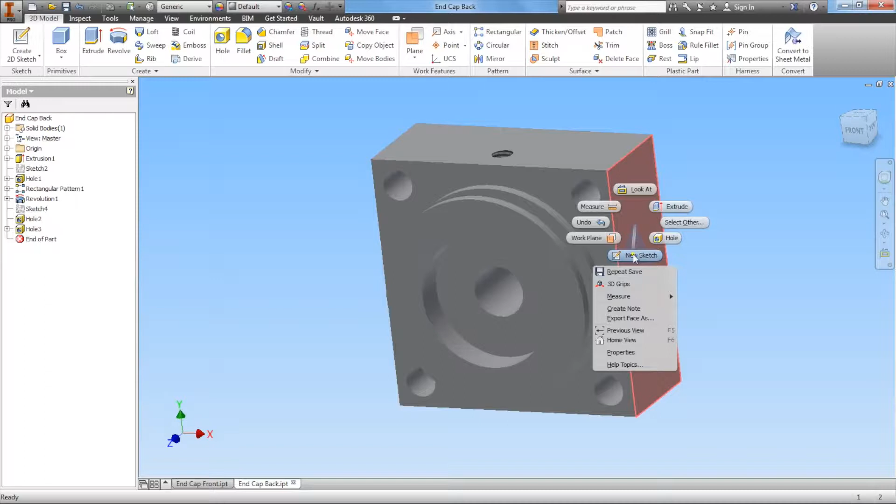Before we add our part on the right side here, we need to mark off a point that will indicate the center of where our hole is going to go. So let's go to this right side, right click, and create a new sketch. Then we're going to grab the point, the center point.

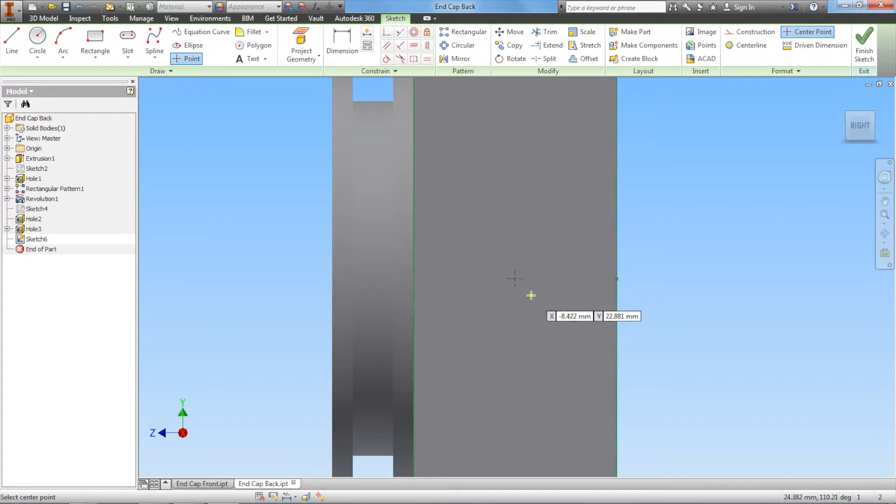I could just place this point anywhere and then use the horizontal and vertical constraint to center it, or use something a little more time efficient. As I get closer to the center here, notice these purple dotted lines - that indicates the center, both vertically and horizontally. If I move it off a little, I'm centered vertically but not horizontally. Now here, I'm centered horizontally but not vertically. But now I'm centered in both directions. So place a point there, and that is the exact center of our right side.

That's exactly where the center of our hole is going to go. So right click, OK, get out of that, finish sketch.

Now we can go and grab our hole feature, and here are the settings you're going to need: you want to do from sketch, it's got to be drilled, simple hole, angled, and your depth is going to be 10 millimeters and your diameter is 10 millimeters. Make sure your termination says distance here. Once you have all of those, go ahead and click OK on the main menu or the green check mark on the mini menu.

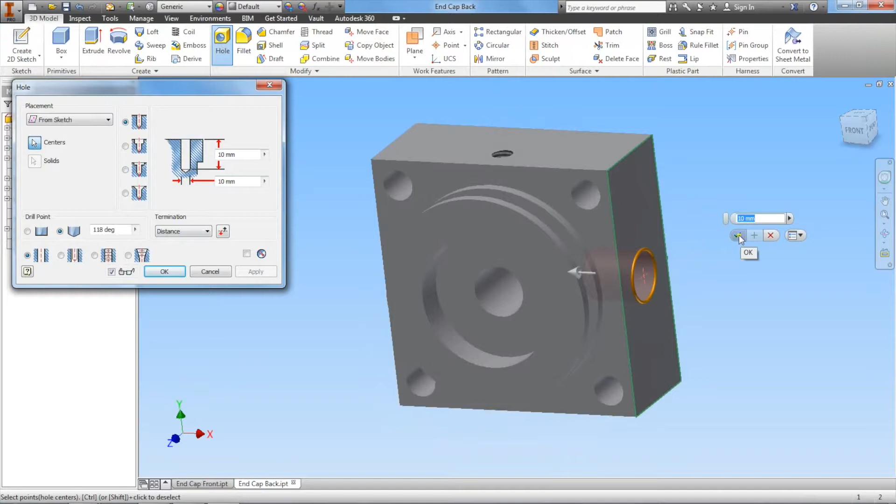Now this hole, like I said, doesn't go all the way through, and we need one identical to that on the left side also. To accomplish that, I'm going to show you a new feature, the mirror feature, and also adding a new work plane feature.

Before we get to the mirror feature, let's go up to plane and go to mid plane between two parallel planes. I'm going to create a middle plane, starting with this right side. Left click on that, then go over to this left side and left click on that - see what it did, that feature created a work plane halfway in between. These two planes are parallel, and it created a mid plane right in between them.

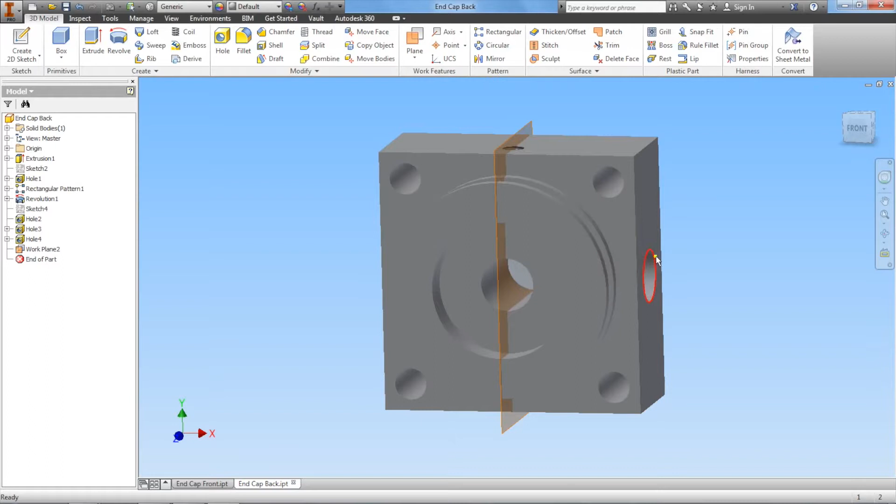Now the next thing we're going to use is the mirror feature. Notice that the mirror feature is located in this pattern section because we've already created a hole and we just want to duplicate it. That's what you do when you're using any of these pattern features. Whenever you're using anything in the pattern section, the first thing you need to select is what feature you're going to duplicate, and the feature we want to duplicate is this hole here.

Now that's highlighted, we want to go over here and select mirror plane. Which plane do we want to mirror, to use as a mirror so to speak? This is the halfway point of our part here. So if we select this plane we just created, it's going to put this hole the same distance from this plane on the opposite side. Let's go ahead and select this, and then click OK.

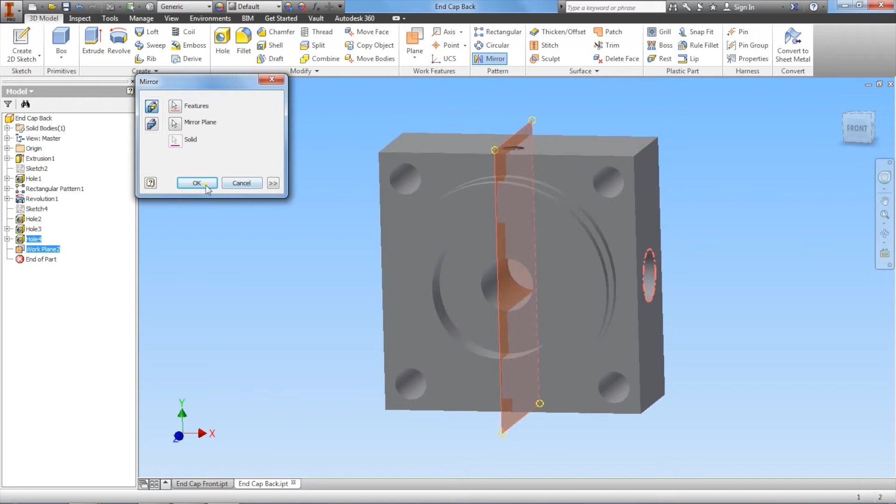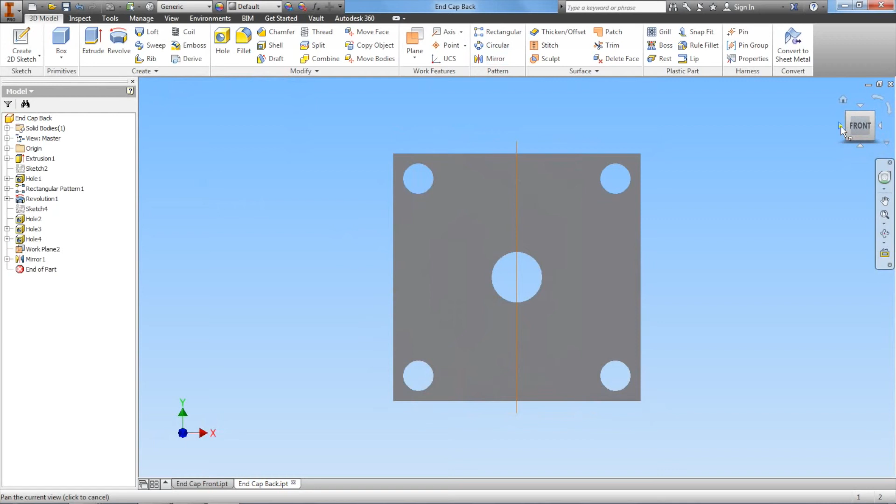Now if I go around to my left side, you can see I have another hole just like the one on the right side. Now, that technique I just used, there are different ways to achieve that same outcome - you could just go over to the left side, place the point, and choose the hole feature. You could do that also, but as you get into more complex parts, understanding and knowing all of these different features available will make working in Inventor a lot easier.

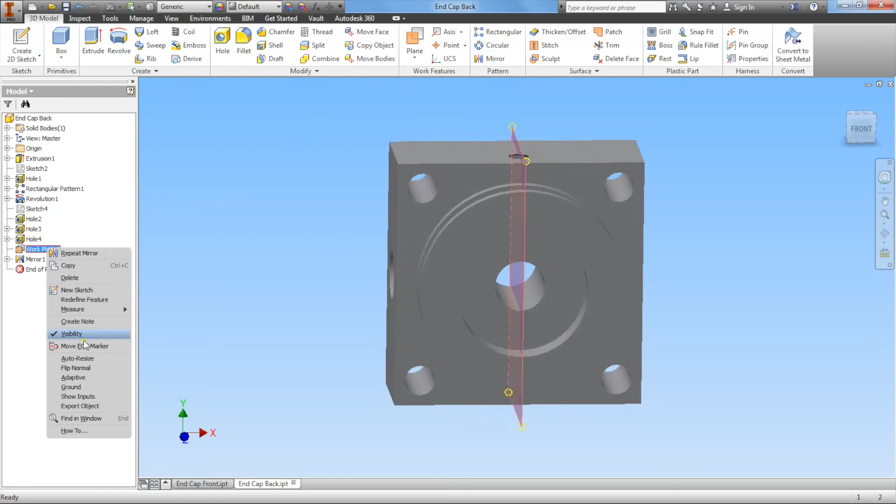So now let's turn off this work plane here because we don't need this. Find it in your browser and turn off the visibility, and we can look here at our part and make sure we didn't miss anything. So here's our end cap back, and that's exactly what we wanted. Okay, and so now we are finished.